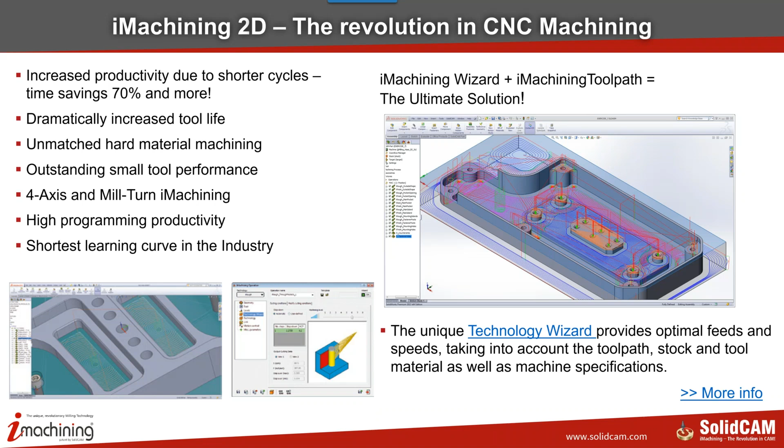Now, basically, iMachining has what we call the iMachining toolpath and the iMachining wizard. What exactly is the iMachining toolpath? It's an intelligent toolpath generator. It calculates the most efficient and tangential toolpath, which ensures constant mechanical tool load. In other words, we're always trying to do a constant tangential toolpath. All the toolpath is always tangent. There's no such thing as a sharp turn inside iMachining. So there's always a constant load on the tool.

And the other thing we're talking about inside iMachining is the technology wizard, which actually does the calculation of the toolpath itself based on certain facts that are given by the operation itself. And we'll talk about that as we go along.

Now, what are the problems that we normally face when working in the traditional manner, as I like to call it? Well, if we take this pocket over here, the pocket geometry itself may be tangent on the corners. But when doing the racetrack path inside a normal pocket operation, when you get to the corners, you'll always have sharp turns. That in itself causes vibration, which is no good. So you have what they call non-tangent toolpaths.

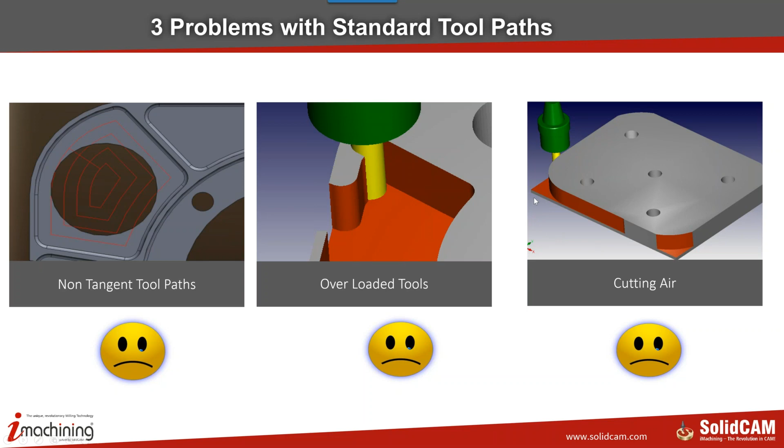Also, you're causing, in many cases, overload on the tool, where the tool engagement goes even up to 180 degrees of the diameter of the tool, and that causes negative effects on the tool. Also, when cleaning around the part, you always have excess material on the corners. So normally with the racetrack toolpath, in order to clean that area, you're going to have a toolpath that goes around in the air. So you're wasting all that time. Okay?

Also, with a traditional fixed toolpath, you have a fixed step over, which is not good, especially in tight corners. So what happens? The operator has to slow down. He has to work slower, and he also has to take shallow cuts to deal with these types of situations. Now, even though you may need a slower cut for a specific area only, since you have to do it in those areas, the entire toolpath is a lot slower.

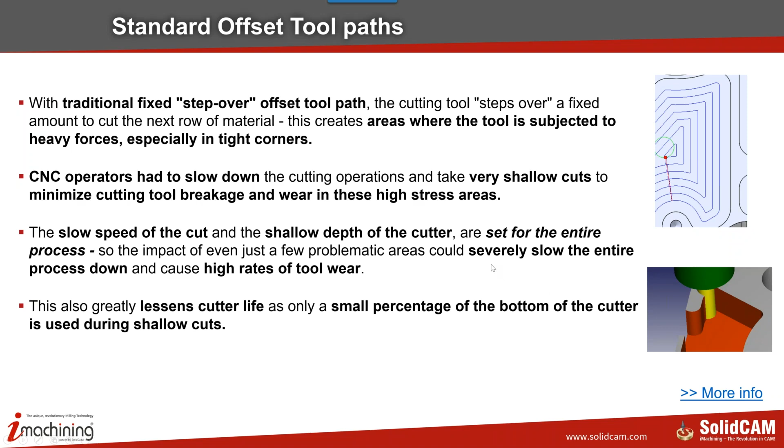And you're also cutting with a small amount of the tool because you're taking shallow cuts. So the cutter life is, since you're only cutting with a small part of it, you're not getting the full use of your tool. You're going to wear out the bottom of your tool a lot quicker also. And you're also working a lot slower than you really can work.

Now, what do we do in iMachining? First of all, we have the intelligent toolpath, where you'll see that we have a smooth tangent toolpath. The toolpaths are always tangent. As you see, we have here a spiral, and even when you get to the corners, we have trochoidal cuts where there is no such thing as a sharp turn. You can see that very clearly over here also in these particular cases where the step overs are completely controlled. And we'll talk about that further on.

Also, we're cutting the exact stock. There is no such thing as air cutting. It'll only cut where it needs to cut. These areas, it will not work in those areas, and just jump over to the next area. So as I said, we can take deeper cuts because of that. You're cutting with the entire tool. And we're also controlling our engagement angle over here. We'll never over-engage the tool itself inside iMachining.

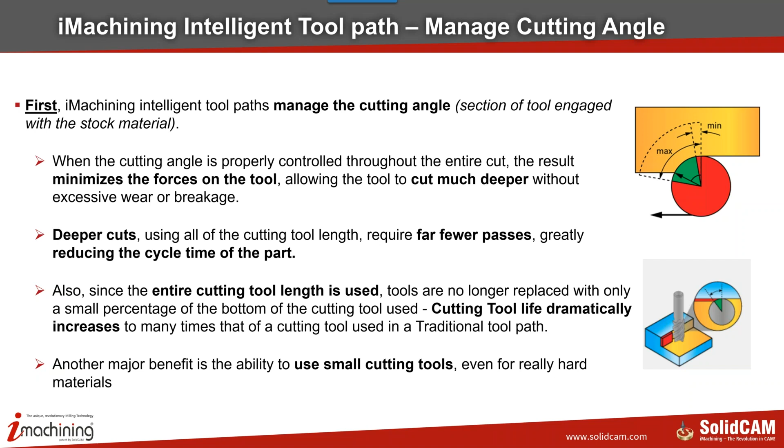Now, another important thing is the feed rate when creating the tool path. We have what we call here a morphed situation, where the tool path actually gets the controlled step over. Sometimes it's wider, sometimes it's shallower. So we actually control the feed rate at any single point. So what that means is that no matter where you're cutting, your load on the tool, your chip thickness on the tool is constant. When you have a constant tool load on the tool, that also greatly increases the tool life.

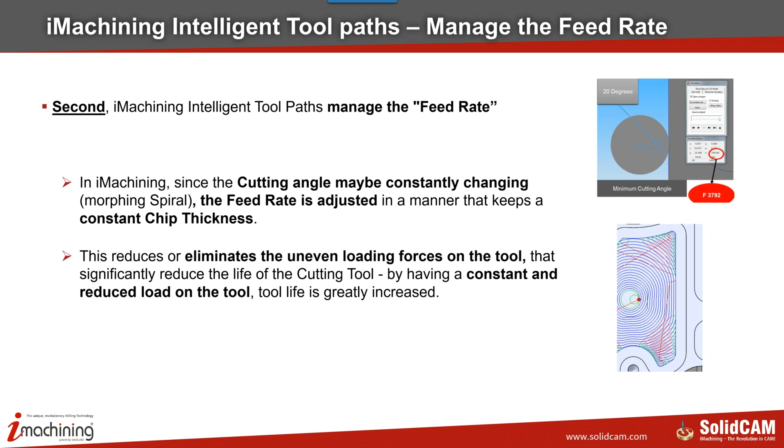Also, not only that, we have what they call repositioning. In the cases where it doesn't cut in a spiral cut or a morph spiral, where it does a trochoidal cut, the repositioning is done very smartly. It keeps itself down and it goes there very quickly, knowing exactly where it can move quickly in a rapid, and repositions itself in those areas. So when you do that kind of a repositioning in these areas over here, you don't need to go around the part. So that takes care of unnecessary moves and also eliminates the air cutting.

Now, as we're cutting, as I said, we also have complete control. We control exactly the minimum and maximum cutting angle of what our tool will be cutting at the time. Also, depending on the material, we can go from anywhere as little as 10 degrees up to 80 degrees of the tool cutting angle over here.

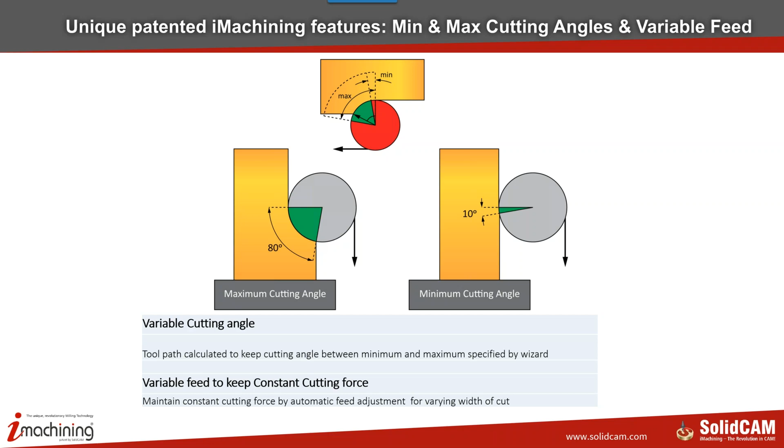And you can see that when we're working on, let's say, 20 degrees, you'll get a faster feed rate. Whereas working at a higher angle, even up to 80 degrees, you get a slower feed rate. You get a slower one here and a faster one over here. Here, there's less of a load, less of an amount of material, so we can go faster to keep the load constant.

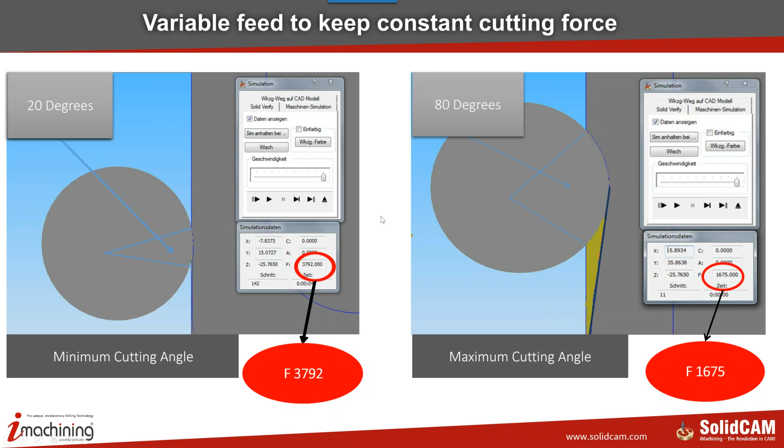And after that, we will spiral out those areas, because now we can machine around from this side and this side and this side, now that this material has been removed. We also have complete control of the efficiency of the spiral. We actually leave that to the user. We have a specific setting inside the program, which we tell people you don't really have to touch. But if you want, you can also decide on how much of a spiral you want.

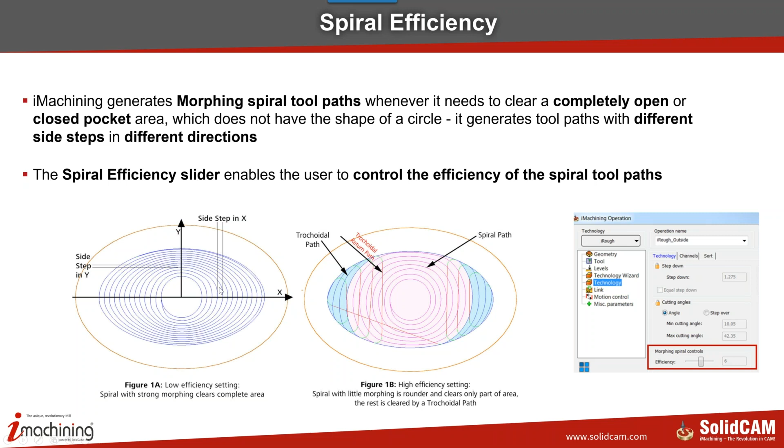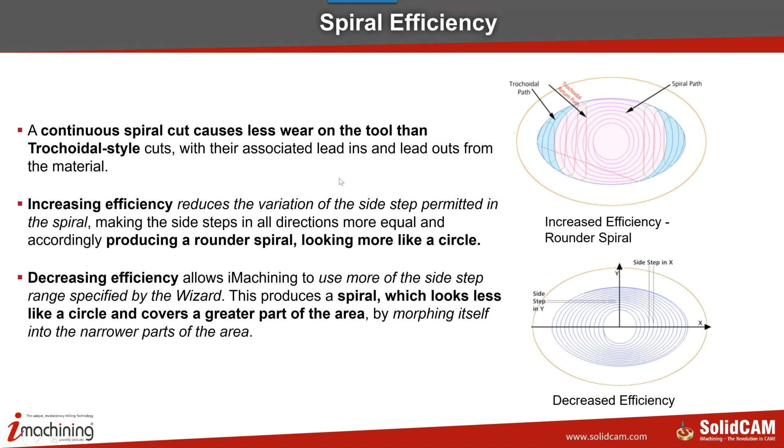Sometimes you can say, you know what, I want to have a very tight spiral. You see, so the side steps here are pretty much equal. But then to clean out those areas together, you need trochoidal cuts. Whereas if you have more of a morph spiral, you can cut more of an area with the spiral cut. As I said, a continuous spiral causes less wear on the tool. Now, let me go a little further.

Now, why do we need the moats? I think I just explained it. It allows the tool path to go around and create the spiral cuts that I mentioned before. We can see that very clearly in this picture over here. If I do a complete spiral cut, a morph spiral on this entire part, which I can if I want to, you'll see that these side steps over here are very, very small as compared to this. I can do that without any problem.

Of course, it may have a little less wear on the tool, but the amount of time it takes to cut this is a little longer. You can see when we cut something like this, it's 5 minutes and 4 seconds. However, if I put in the separating channels, as you see over here, it'll separate those areas and then continue with a spiral cut in each area itself. So that also cuts down on the machining time.

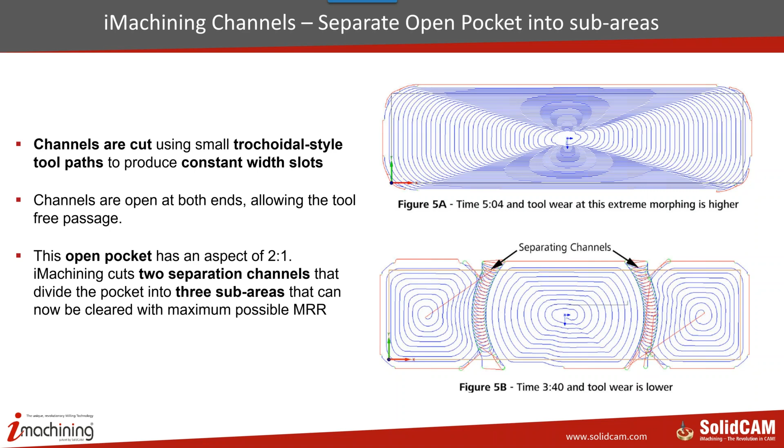Now, in iMachining, the algorithm actually measures everything and decides on its own which is the better way to cut. But again, we also give you control if you want to do it differently. This can also be seen in cases like this. You can see over here, we have a wall and a large area. If I didn't put a separating channel, this is how it would cut. It would do constant trochoidal cuts around the part.

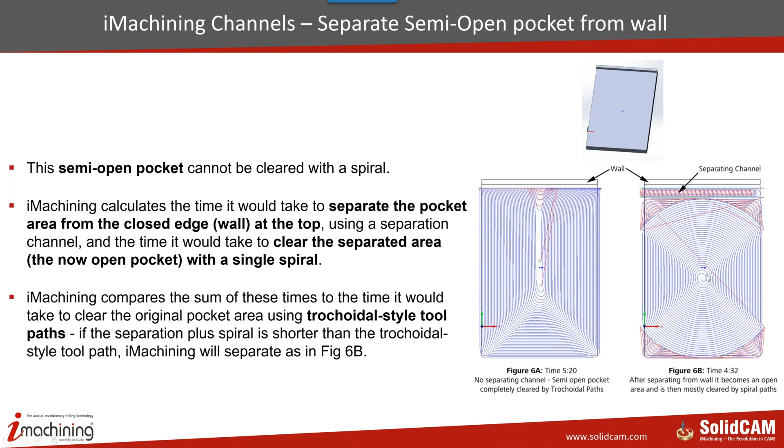Sometimes you have no choice, and we'll explain a little later on why I wouldn't have a choice. And there are other times where it's better to do a separating channel and then do your trochoidal cuts and your morph spiral over here.

Now, let's say I have an island in the part, and I was working from the outside. How do I keep it doing a spiral cut as often as I can? When we get to a certain point, we do a spiral as much as we can, and then we do a moat around the island, or a separating channel. We form a separating channel around the island, allowing us to then do more of a morph spiral inside the part itself.

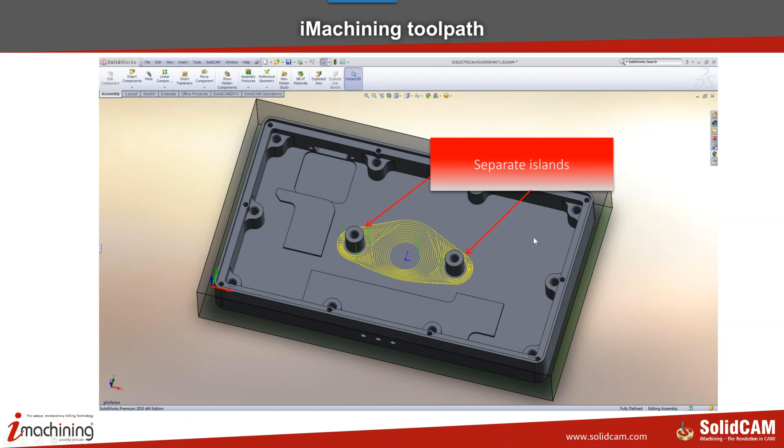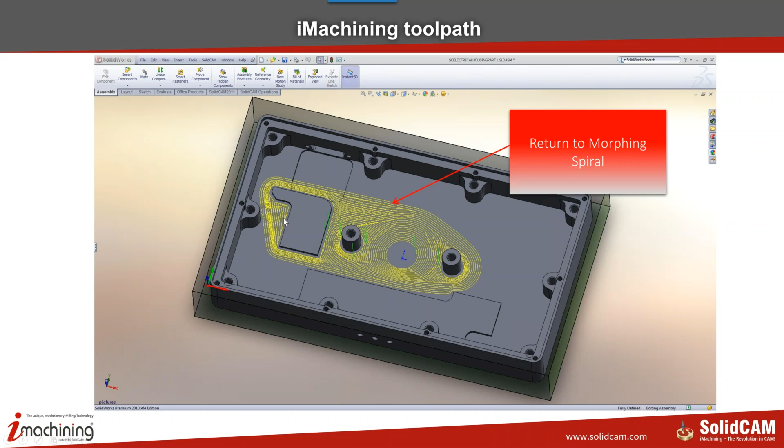Now let's take a look at this particular part. We have to machine out this pocket. In the beginning, it's starting with a morph spiral, but now it's hitting these islands. So it does the separation with those little moats I talked about around the island itself. Once it does that, it can continue with more of a morph spiral until it hits these walls. Then it continues with a separating channel around here. Now it did a little more of a spiral and also trochoidal inside here as well. And that's how it works.

Now we also have a function called rest material. For example, obviously I'm not going to machine a large part with a small tool if I have small radiuses. So for the rest material, we'll only machine the areas that have to be cut, such as these corners, using a trochoidal cut in this particular case. And even in the areas it couldn't get into over here, it'll also complete finishing those areas.

And when I do a finish cut, if I had those, it'll first do a semi-finish in the corners, doing trochoidal cuts, and its final cut will go around the entire wall, giving it a nice smooth finish. Now you can also see that when we cut out parts with a closed pocket, we also do a helical ramping into the pocket to get down to the bottom, and then finish off with whichever tool path we need to use. We can see that very clearly over here.

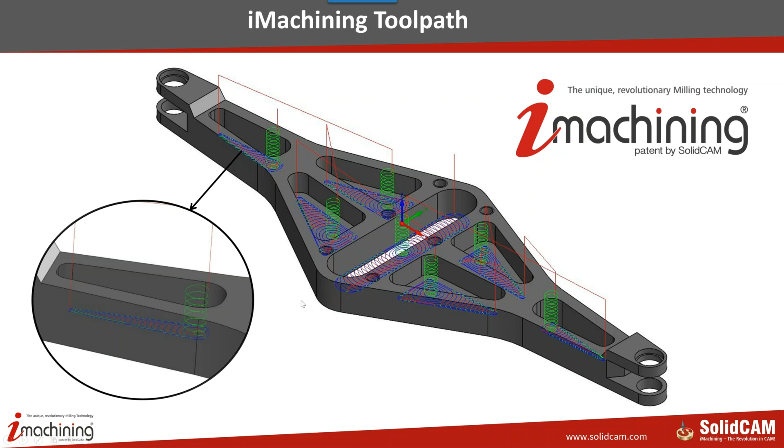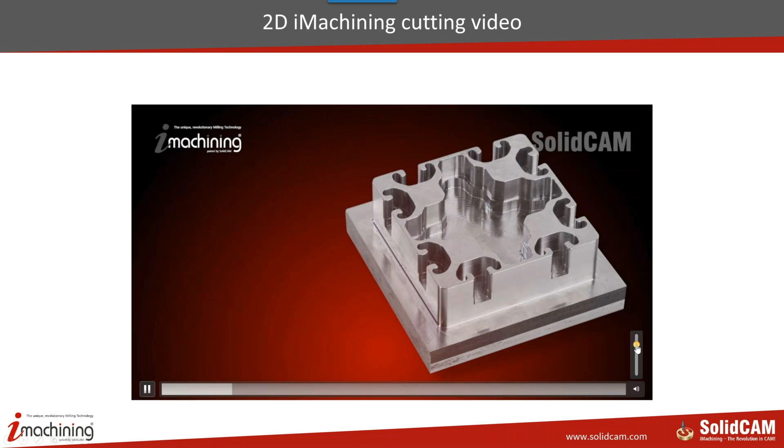Now let's take a quick look at this film. I hope you can see it as well. I want to get to a specific point, this point over here. We've machined the outside. Now we have to start machining inside over here. What you see happening is the tool going inside using helical ramping, the 10 millimeter end mill, and it's going down to a depth of 19 millimeters.

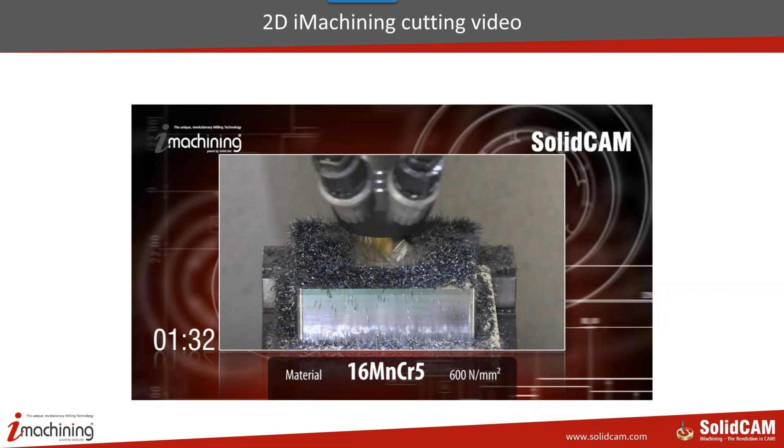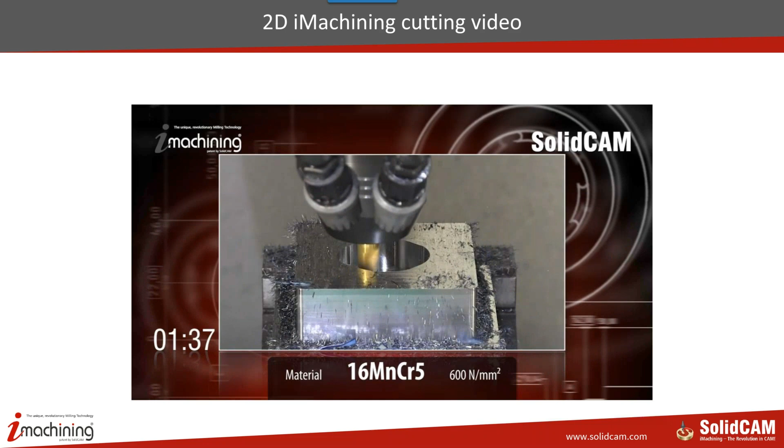Now look what happens when it hits the bottom. What happens with the feed? You can see all of a sudden the feed picking up. We're just doing it in slow motion, so you can see exactly what's happening. You can see it doing a morph spiral cut around the part, which is constant load on the tool, giving you the most efficient way and the best way to cut with the tool itself.

Now, when a typical programmer has to cut out material in the part, what are the dilemmas he always has when programming in the traditional way? Even the most experienced machinist has to take into consideration, one, the type of material that he's using, what kind of cutting speed he needs for that material, the hardness of the material, what's his maximum step, what's his minimum step into the part. This is something that the user always had to do on his own.

As far as the tool goes, he had to know the length of the tool, the number of flutes, the helix angle of the tool, the chip thickness that he's allowed with the tool itself. All of these he had to know just by experience. With the geometry, he always had to take into consideration how deep he has to go with each cut. And with the machine itself, he had to know the maximum spin rate or feed rate, the power of that machine, even the memory size of that machine. He had to take that into account.

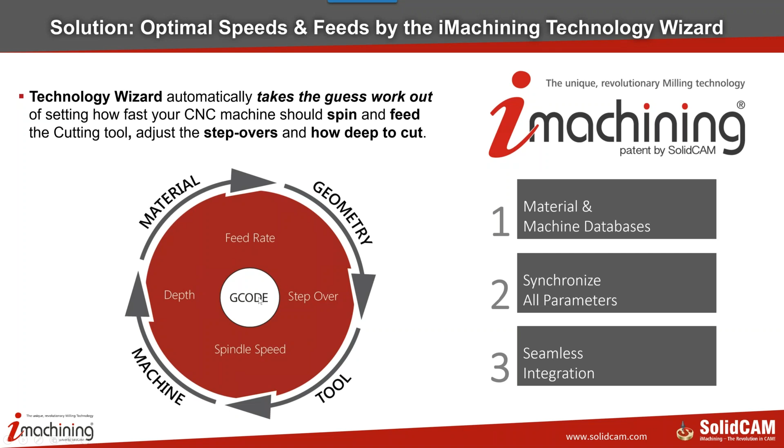Now, iMachining deals with all that. Together with the technology wizard, it takes into consideration your material, your geometry, the tool that you're using, even the machine, puts it all together, and gives you the right G code for exactly the way it should be done on the machine. It should be noted also that iMachining is patented by SolidCAM itself.

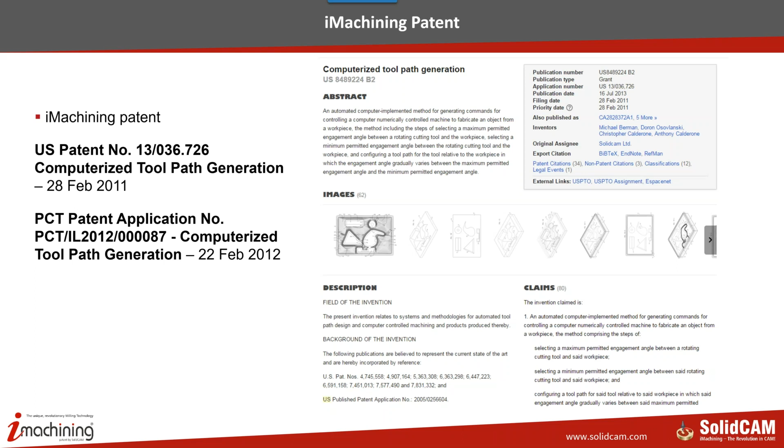Now, there's one other thing that we have inside iMachining, something called the iMachining level slider. We'll talk about it, and I'll show it to you later on as I show you the actual program itself. What's the role of the iMachining slider? The iMachining slider allows you to be more aggressive on the part, or work in a less aggressive, a little more safe mode, I might simply call it. It actually controls the removal rate.

Sidney? Yes, go ahead. I have a question. When you say more aggressive or less aggressive, with this slider that you're using over there, it controls the speed, I mean the RPM, and the feed equally. Yeah. So if I want to separate it and control the speed or the feed separately, can I do it here? You can do that in the modify cutting conditions.

Okay, but take into consideration. You said that over here we control this, the levels control the speeds and feed rates. That's not all it controls. It also controls your minimum and maximum step over.

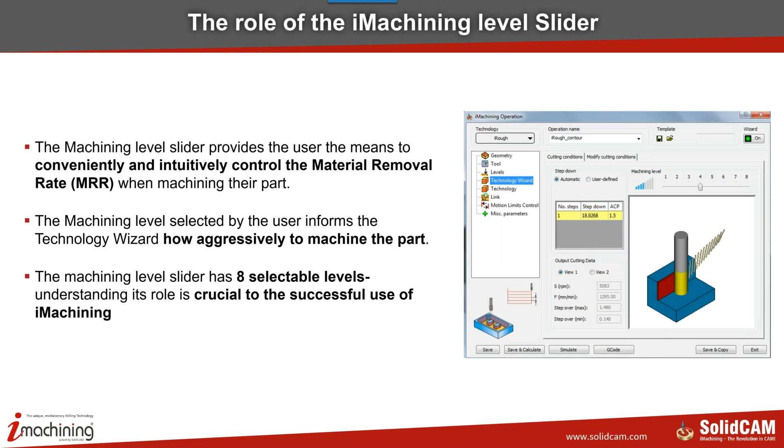Because remember, we're not doing any sharp turns inside there. Even when you get to the corner, it will not go to a point and all of a sudden sharply turn. It does a trochoidal turn inside the corner. In other words, your tool will never have a radius of the exact tool radius. Okay? Yeah.

Now, the technology works, it makes its decision knowing the following. It knows the part geometry, the material properties, the tool properties, and the machine limitations. Okay? Now, the algorithm works hand in hand to give you the exact tool path generator with the proper feed and spin rate and the proper step over, making it very safe to work on the CNC the very first time.

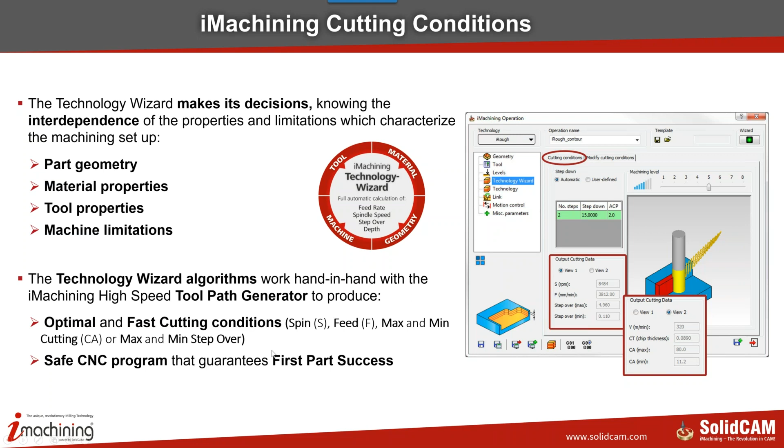So you may ask, why do I need a level slider? I mean, why not work all the time with the highest level if we're controlling everything? The answer is very simple: potential vibrations. And what do I mean by potential vibrations? Okay, there are certain things we know. We know the tool, we know the material, we know the geometry, and we know the capabilities of the feed rate and the spin rate and the horsepower of the machine. All that we know. There are things we don't know.

Let me go to the next thing. There are certain things we don't know. Okay, let me go into that. Sorry, I went back a little too quickly. Okay,

we don't know the rigidity of the state of the machine. In other words, if it's an old machine that has more backlash, how you maintain your machines, those are things the program doesn't know. Only the user knows. Also, when you're clamping the workpiece onto the table, we don't know how well you're holding the part, if it's a really rigid fixture or some lightly used clamps, okay?

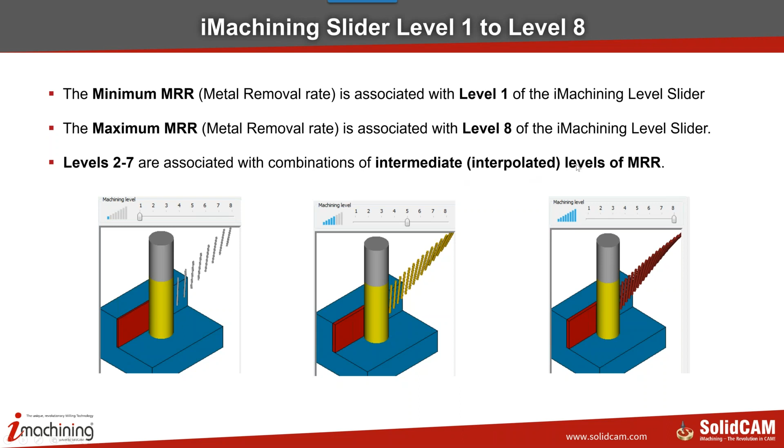Okay, now there are times, even with certain materials, where even going up as high as 8 is not enough. So in our modified cutting conditions, we have something called turbo mode, which actually takes the levels and ups it by 25%. For instance, in aluminum, we found that you can even go higher. And many times I've demonstrated aluminum working.

I remember the first time I demonstrated this for a person, I went to his tool shop, and he had a 90 millimeter deep pocket, and he was using a 16 millimeter end mill. And he had like a 30 millimeter depth of cut, I believe, on the end mill itself. I put it on the machine. He had already pre-drilled a hole, even though he didn't have to. And I put it on turbo level 7.

And he said, "Are you sure?" And I said, "Don't worry about it. Tool breaks, I'll replace it." Okay? He started working, and all of a sudden, you hear the noise coming around. He jumped away, and all of a sudden he starts looking. The owner of the shop came down to the machine. He said, what's going on here? And he saw how much material was coming out, and he couldn't believe what he was seeing. At the end of the cut, we looked at the tool.

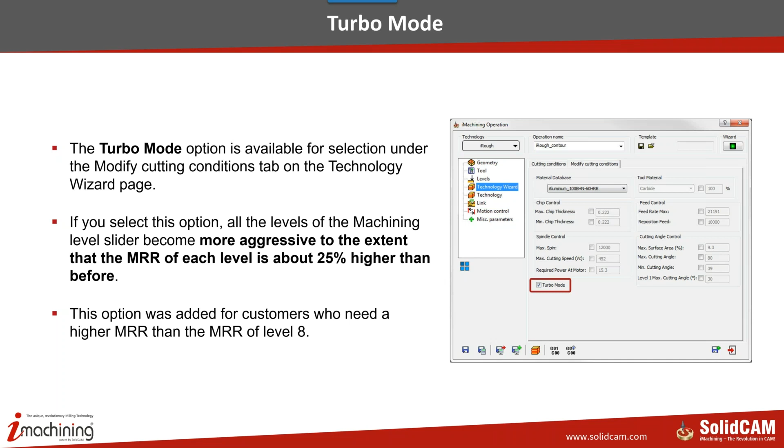But let's go further now into the program. Okay. Now, when defining a machine in iMachining, we can define also what's the default machining level. In other words, you have a specific machine, you know already how this machine works, you can set yourself what you want as a default level. It doesn't mean you can't change it inside the program itself.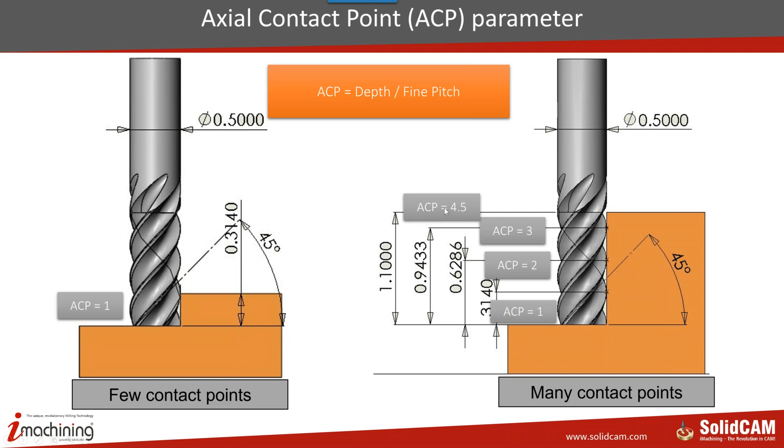Okay. Now, as I mentioned before, it reflects the actual number of contact points with the vertical wall it's cutting along a vertical line. Okay. Example. Now, what I mentioned before: 1, 1.1, 1.2, 1.8, 1.9. You notice these are close to full numbers, to whole numbers. The vibration over there is less likely.

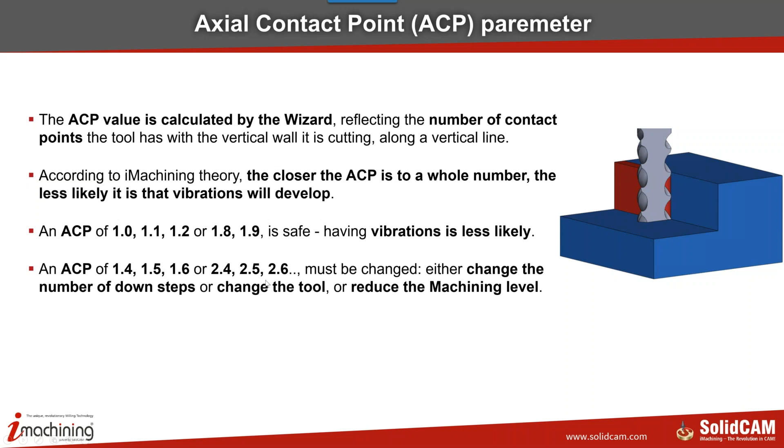Okay. Whereas you have something like 1.4, 1.5, 1.6, or 2.4, 2.5, 2.6, you have more of a chance of vibrations. So we can control also the down steps if we want. And some people are willing to work even in those conditions. But just know that we take that into account when working with iMachining.

So for example, we also mark it, by the way, inside the technology wizard. You'll see sometimes the amount of steps. You'll also see the step down, and you'll also see the total step down, how many steps down it has to do each time, and you'll also see that it's in red. Okay.

Sometimes if I mess up with the colors, excuse me, I'm colorblind, but it happens every now and then. But okay, yellow, it's not so good, but it's pretty good. Here, this one over here, see, you have 1.9. It's very close to a whole number. That's an excellent cutting condition. Okay.

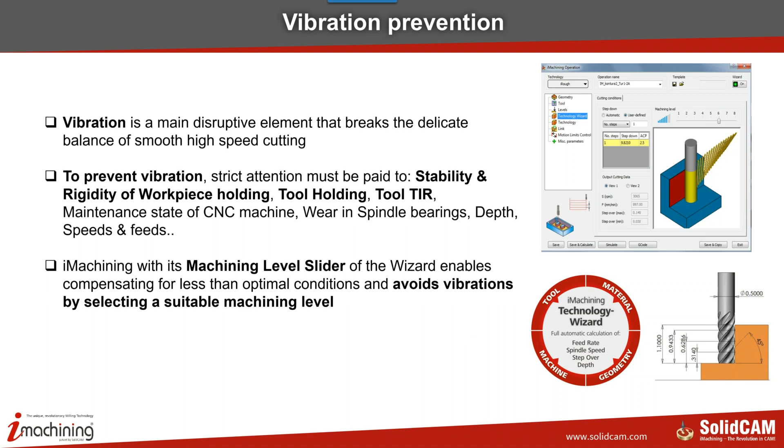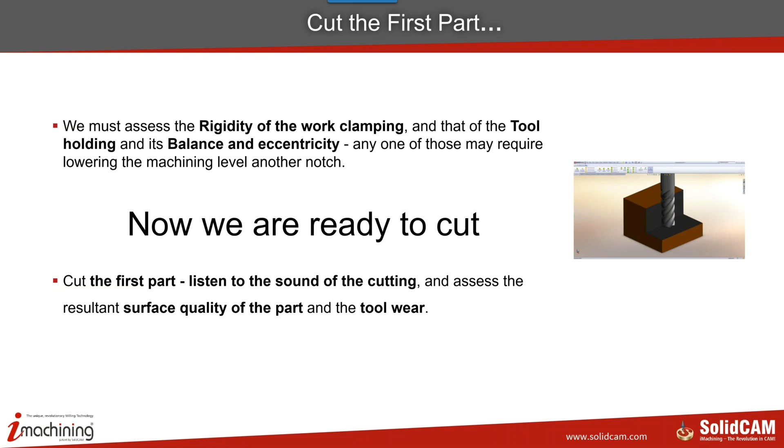So the level slider also helps control the vibrations, because you're putting in the exact right amount of pressure that you need for each particular case. Now, once you have everything set, you're ready to cut.

Now, I always recommend when working on iMachining, when you first start out and you're not sure, always start out with a lower number. Okay? You listen, you hear there's no vibrations, you can start working your way up until you get used to it. Once you start working with iMachining on a constant basis, you'll know already by yourself. But in the beginning, start always with a lower level.

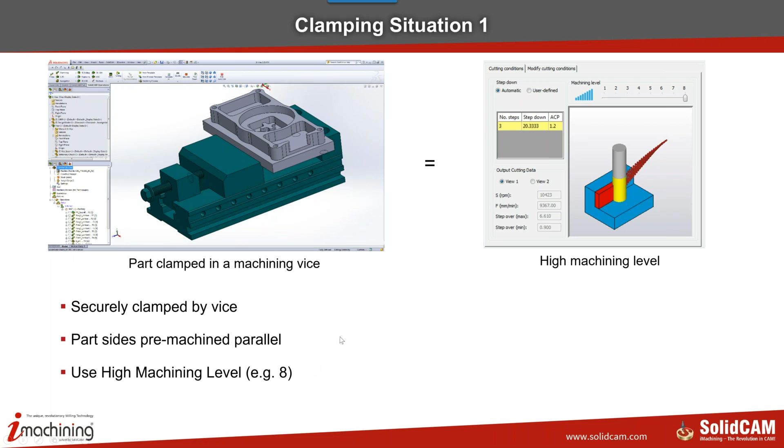Now, I mentioned before what kind of situations you would use different machining levels. So for example, if I'm holding a part clamped in a machining vise, a pretty rigid way of holding, I'm not talking about the machine condition, I'm talking about the clamping situation. This particular clamping situation, we could go even as high as 8. Okay? A 5-axis clamping position held very well can also go many times up to 8.

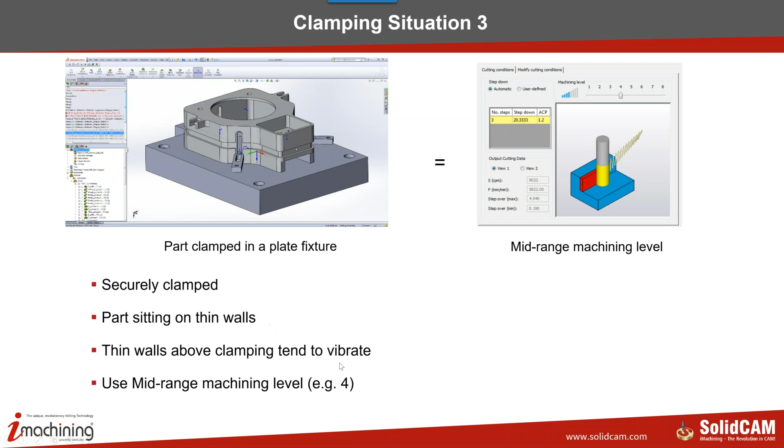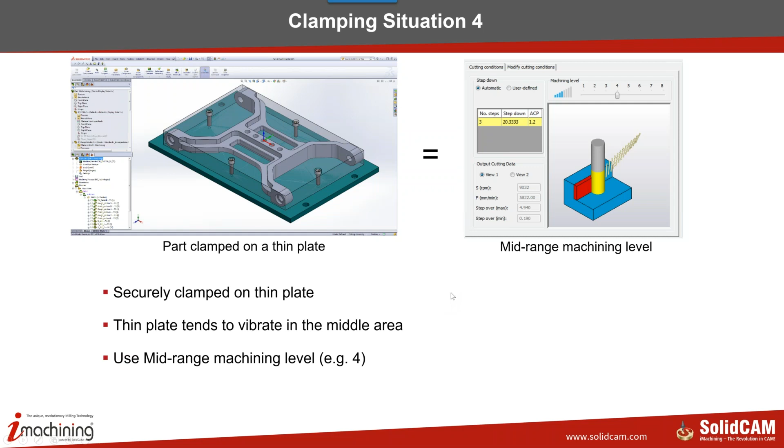Holding it clamped on a fixture plate is not always as good, but sometimes you have no choice. Okay, so in those particular cases, you may start off with 4. Okay, even with a clamping plate like this, held on 4 screws. On a thin plate, you may also want to start off at a lower level. Again, if you see it's fine, you can always pump up the action.

And I've seen this, by the way, in a machine. One of my first trial cuts with somebody, he was actually holding it on a fourth axis turn head inside the milling machine. So even though the plate was fine, the basic support is between two centers. So the further out you got from the center, the more vibration you had. So you could not work at a high level. In that particular case, I even went down to 2. Okay.

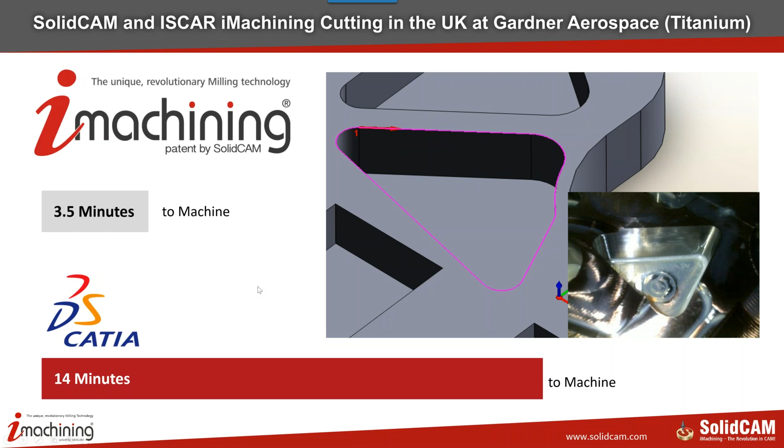doing it the traditional way, I know you guys are not ISCAR, but we did it on ISCAR. I'm sorry about that. But when they tried it with the most efficient way they knew how to cut without iMachining, it took them 14 minutes to cut out this pocket. We used iMachining, changed everything over to iMachining technology. It took them 3.5 minutes instead. Okay.

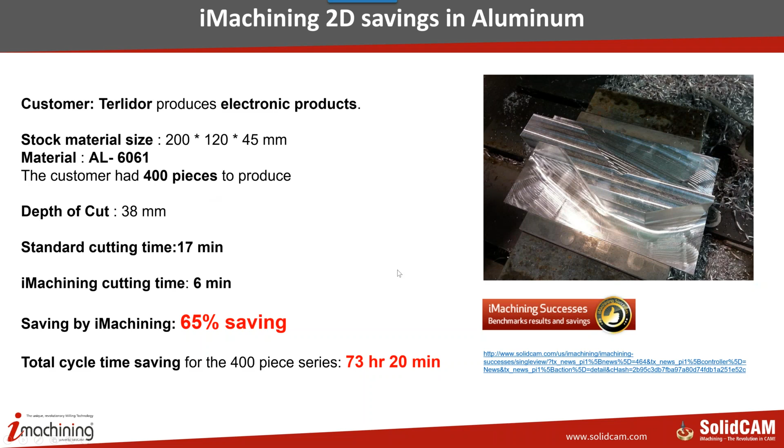We have also different trials that we've done where we cut down from 17 minutes to 6 minutes on aluminum. People say, how come? Well, aluminum, I can really work hard. So even on aluminum, we're a lot more efficient. Titanium is an excellent case of where to use iMachining.

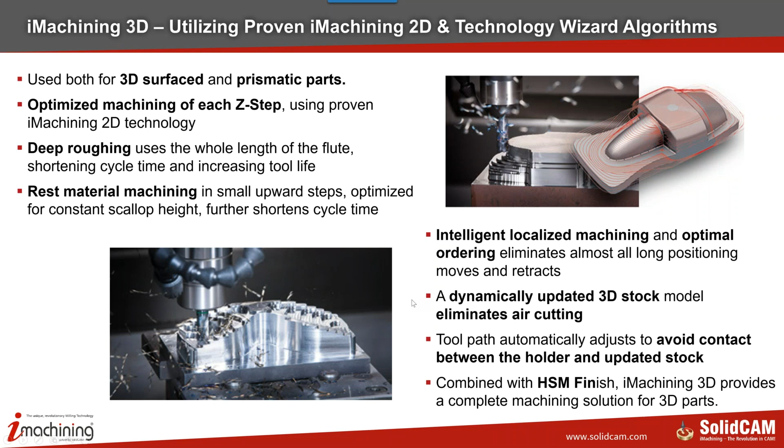And we also have what we call iMachining 3D, where it uses the technology that we know in iMachining 2D, but it optimizes the machine. It does the deepest cut it can, but then, since it's shaped over here, it does what they call a step up on each area, and then makes steps on the part itself. You can actually see the machining over here, and I'll show you a little film about this in the morning. It optimizes the Z step cutting. It slices into Z's.

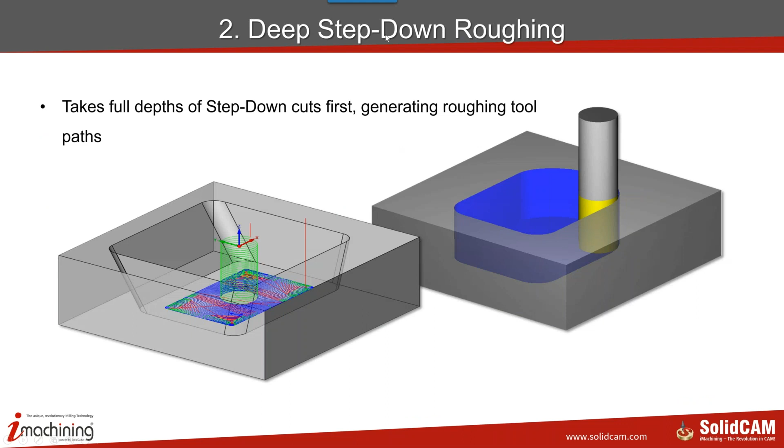Going deep into the pocket, doing as deep as it can. As you see over here, it's going to do first the very bottom. You can see the trochoidal cuts in the corner. Then after that, it does a scallop going up. A controlled scallop, and that's how it works.

So you tell it how big you want the scallop, and certain areas will have larger steps, and the steeper areas will have smaller steps. You can see that immediately on this as well. And we can set the size of the scallop that we want. Now, during the step up procedure, the axial depth of cut gets smaller.

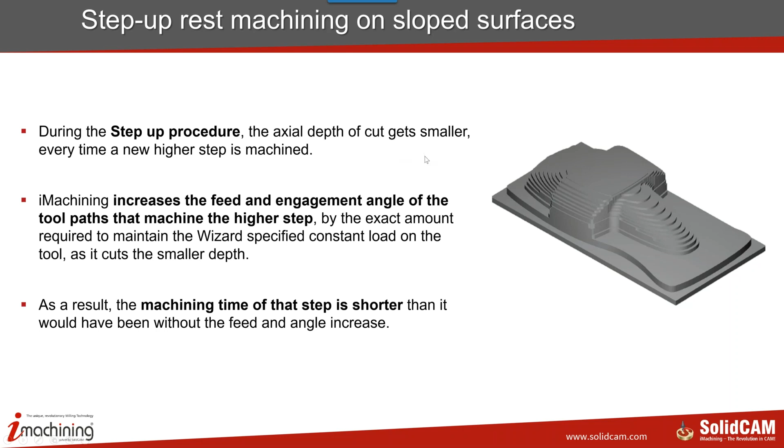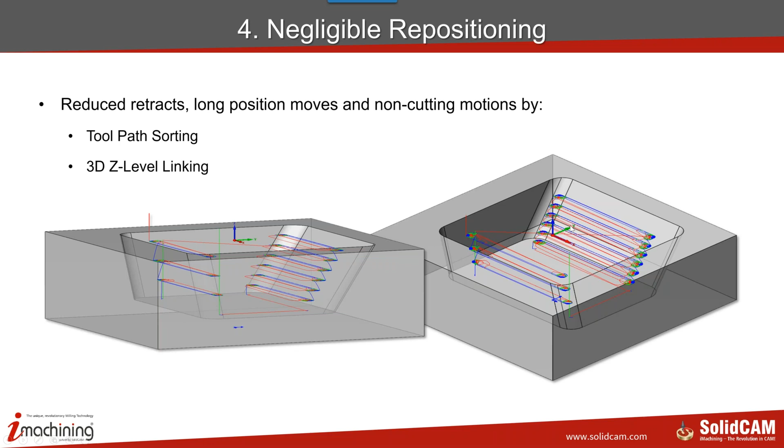Now, let's take a look also at this particular part that I showed you before. It'll also only work where it needs to. Now, look at this. You see it's working only on that side now, doing its step up. These walls were flat walls on the side over here. It doesn't have to do any kind of machining over there. So it's just working in the areas where it needs to work.

Now, when it comes to using a smaller tool afterwards to clean out the corners, it'll only work in those particular areas. And you can see that also very well over here. And I believe, Zoro, you asked me before about the corners. As you can see, even in the corners it did trochoidal cuts. Okay.

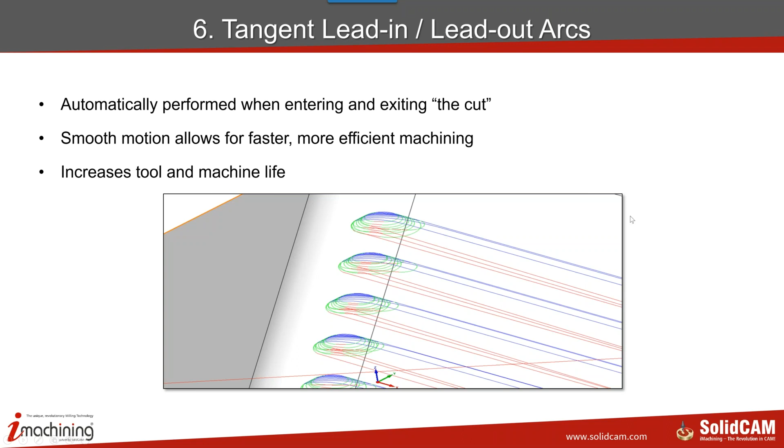And whenever you have a lead into the part and lead out, it's always tangent: lead in with a tangent, lead out always with an arc. So there's never any sharp turn. Okay? Now as you're going up, the cutting conditions are adjusted automatically. Because when you're down at the bottom, you're cutting with the full step of the tool. But as you go up, there's less of the tool that's actually cutting.

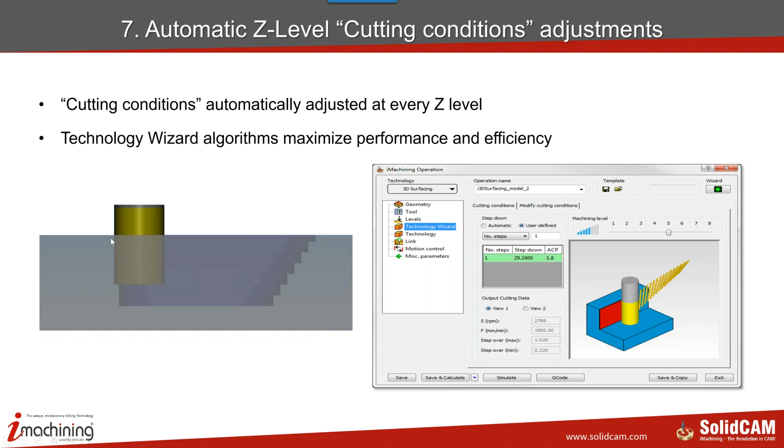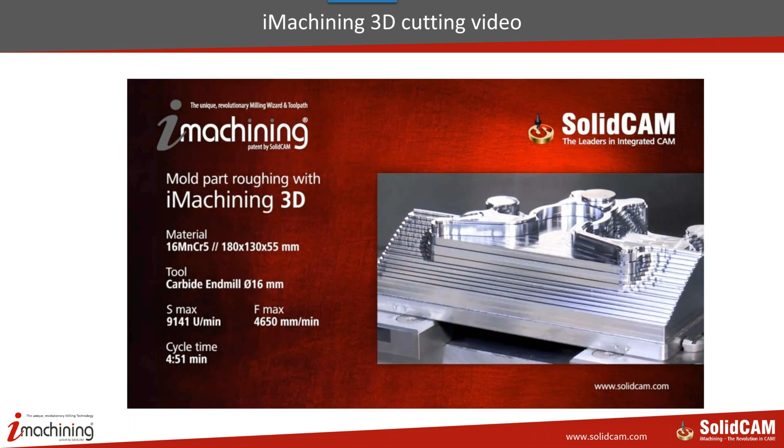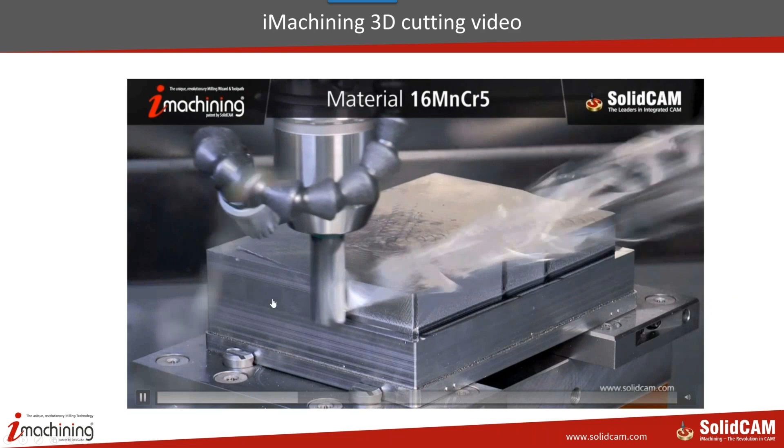And as I said, iMachining automatically determines the cutting conditions. Now let's take a quick look at this film of how it cuts a 3D mold. Now you can see this has to be done with a specific step down, because it probably has to go further down over here. So note that it's cutting first, and now it's also starting to step up. Starting to step in. The trochoidal cuts in, and now it's stepping up.

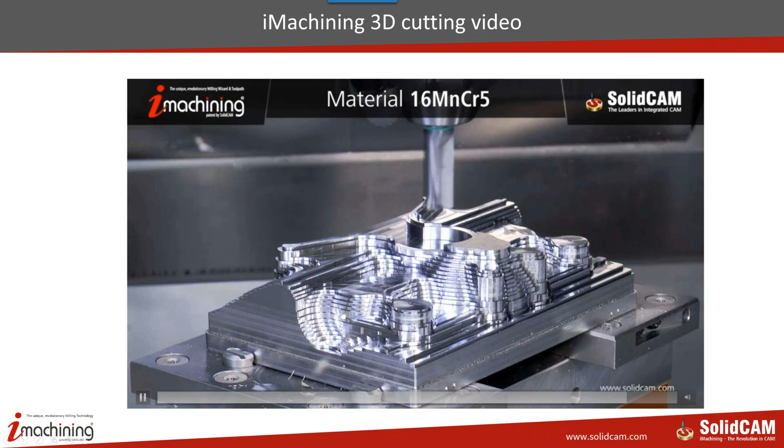And you can also notice how it localizes itself to work only in a specific area and then moves on to a different area. So you don't have this repositioning around the entire part. It always cuts in those particular areas.

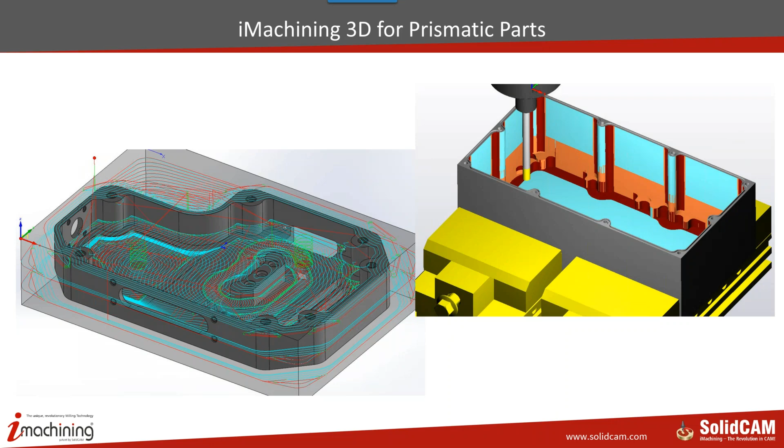Okay. Now, iMachining 3D is not only for 3D; it can also be used for prismatic parts. For instance, I can do this part in iMachining 2D, no problem doing it. But with iMachining 2D, I have to program each one of these areas; each one of these depths has to be done in a different pocket. I have to do one operation after another operation after another operation. If I use iMachining 3D, it automatically recognizes the depth of each area and knows to work on each pocket exactly the way it should.

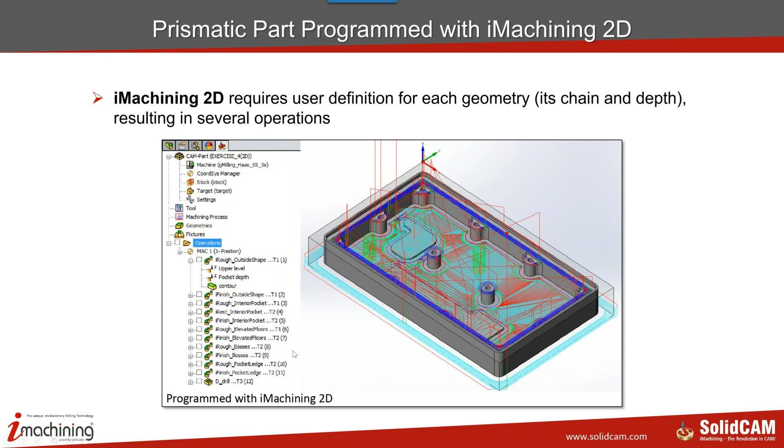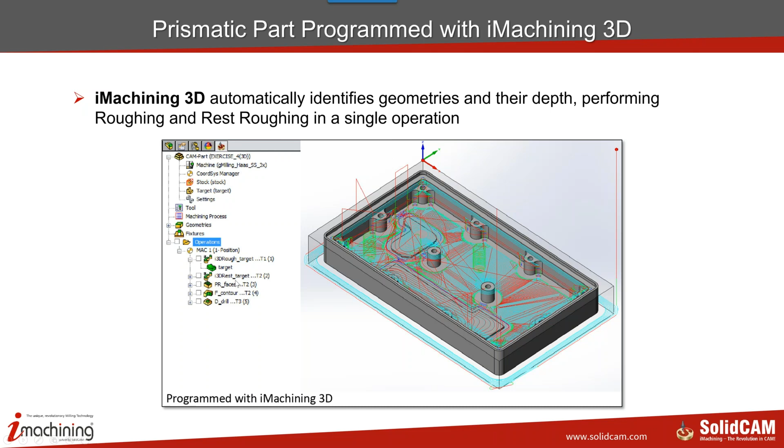Now, I should mention, iMachining 3D is a roughing tool. Okay, it's meant for roughing. Now, for prismatic part programming with iMachining 2D, as I mentioned before, you can see all of the operations needed just for this. If I use iMachining 3D, you can see that we basically have two iMachining operations, one for the roughing and one for the rest material, and then we just use different technologies for finishing. Okay.

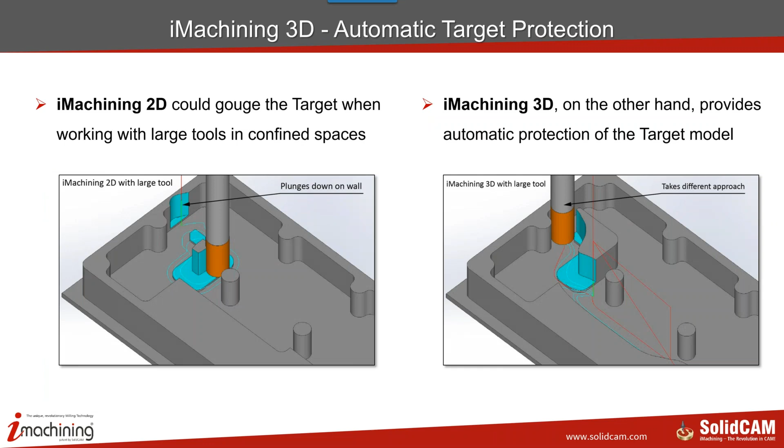Okay, and I mentioned in the very beginning that it's also used for indexial, or let me go further down in the presentation. I mentioned also that it's used for mill turn. Inside mill turn, we also have it. It's very useful. So we'll take a look at this little film over here. Type of machine. All right, we start with the regular mill turn. That's fine.

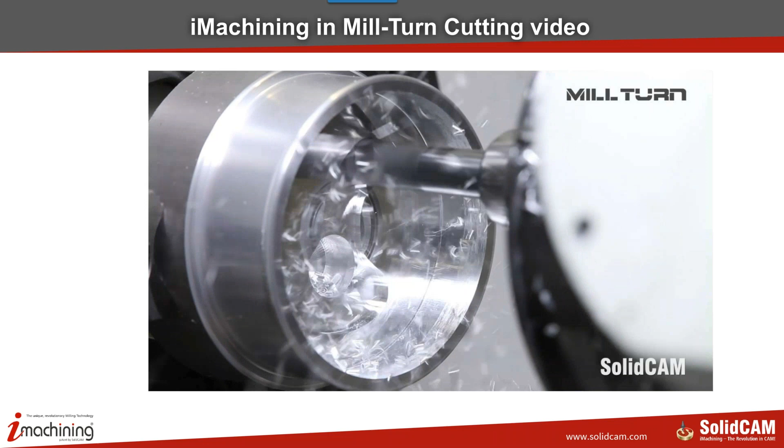Now you can see this is a regular pocket over here, but I want to go a little further on in this presentation. Here we go. We get to the other side. You can see how iMachining is used inside a mill turn machine. In this particular case, the cutter can't go past half the way, so we use the C-axis of the machine itself. You can see very clearly the trochoidal cuts it is doing on the side over there. Okay.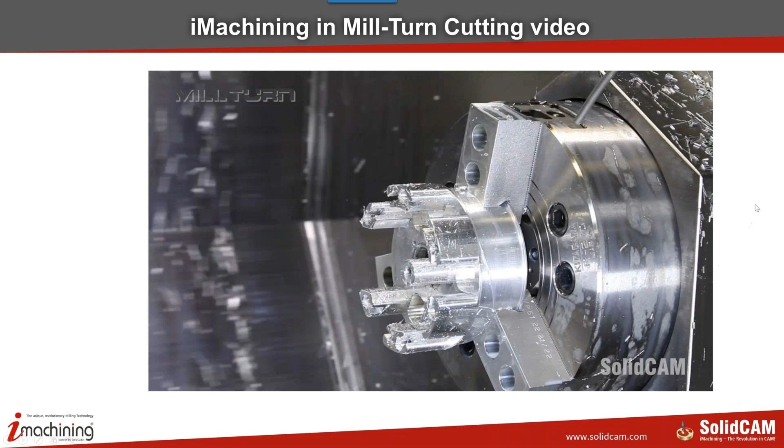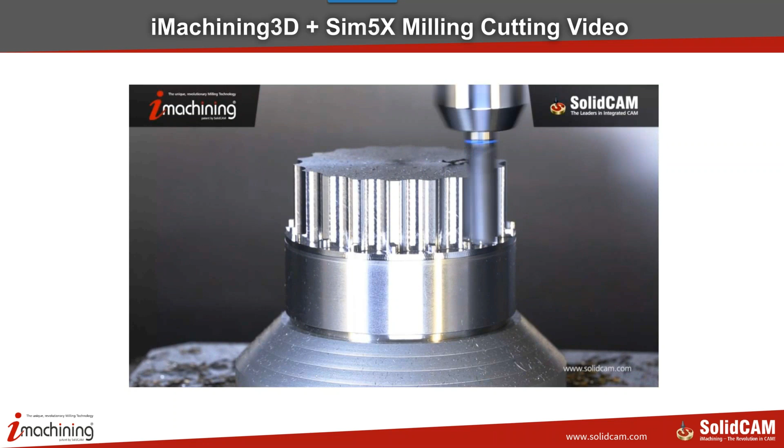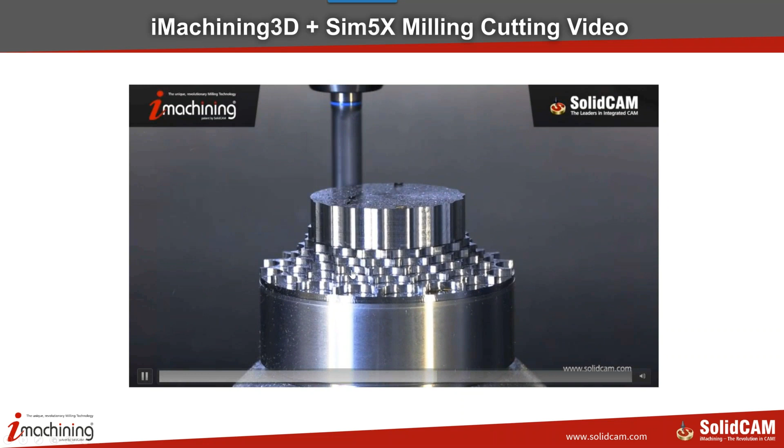And we're even using iMachining 3D together with simultaneous 5-axis machining. Move it ahead a little over here. You see, we're using the maximum amount of the tool that we can. It basically does that around the part itself. Then when it finishes that, let's see what happens now. See, now it's actually working in a morph spiral around the part. And now over here, you can see the actual step up that it does on the material.

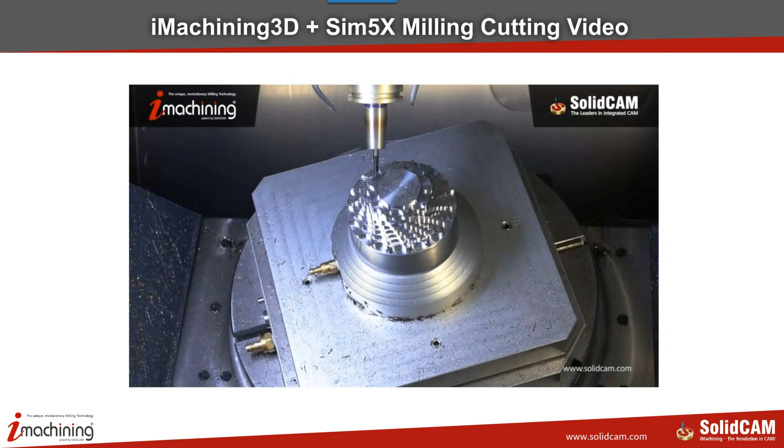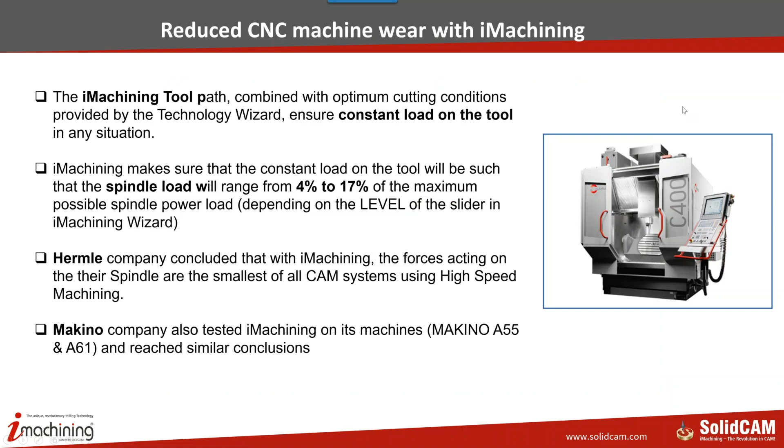So once we finish the roughing on this, there's a lot less material left over now, a lot easier to do your 5-axis simultaneous machining. Okay. That's all I'm going to show you right now in this presentation.

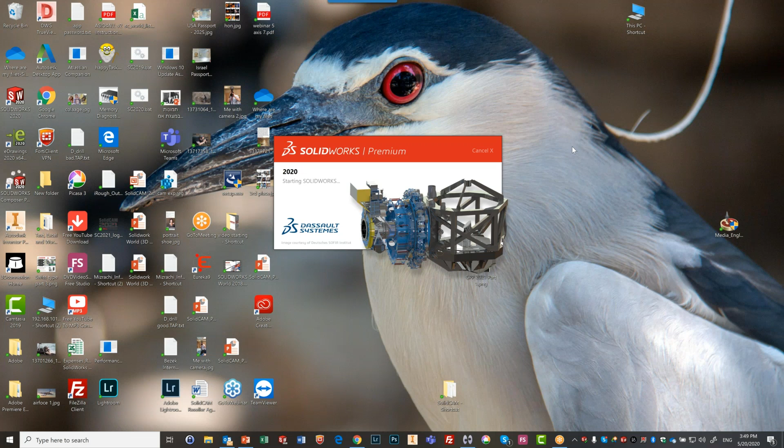Are there any questions? I know we didn't touch on the program itself. I still have a few minutes left, and I can start showing you certain aspects as far as setting up the part. Okay. So let me open the program. The bird does not come with the program. That's my personal photography. Okay, I'm going to load a part in SolidWorks itself. We're going to do the setup.

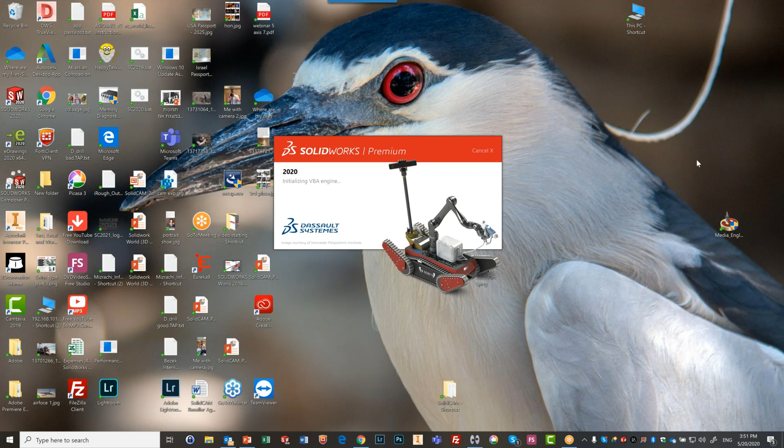Now, before I start the actual setup, oops, sorry, my mistake. Just before this, someone asked me to check something, so I forgot to put it back exactly where it was. So just give me a moment. Let me just go over here. And there we go. Okay, that's why my SolidCAM didn't load. Usually I'm very well organized with this. We'll just wait one more moment. Something is not working correctly here. Very strange. Okay, I think I know why. Again, if anyone has any questions, you can always ask. Okay, I think I know why.

Let me go into my add-ins. There we go. That's why. Okay, now SolidCAM is loading also. Usually I keep that on. Just another moment. There we go. Okay, now I'm going to reload the part that I want to work on.

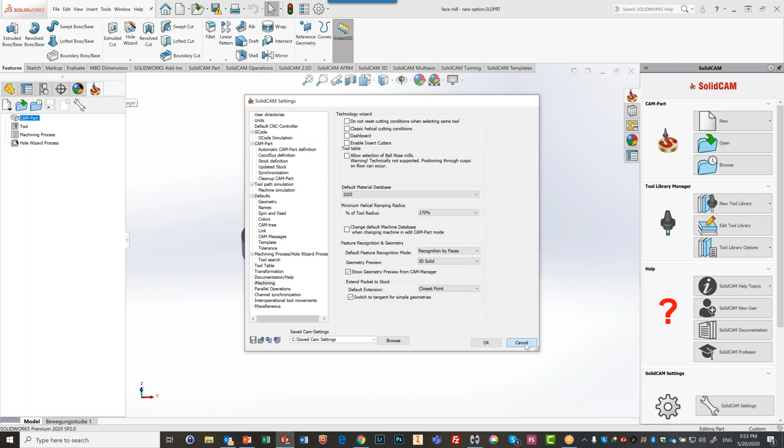I decided that most of the time, for some reason, I'm working on 1020 material. So I have that material in my default database. That doesn't mean I can't change it, and I'll show you this a little later on. But if you see this material coming up automatically, you'll know why it's coming up over here. Okay. So I'm going to start my program. I'll go to New, Milling.

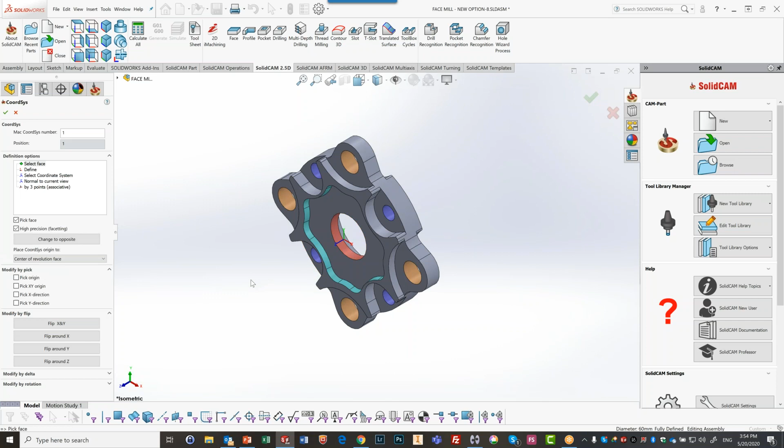Okay, I'll create my coordinate system. I'm going to have it at the center of the revolution face. I'll click on this face over here, so it's on the center of that revolution face.

And I've already automatically created my stock. You can see my stock at this point is 2 millimeters around the part itself. I'm not going to do a face mill operation, so I'm just going to leave this here as 0, as if I did one already. Okay? That's my stock itself. We have our target, which I talked about before.

Now let's go down here to the iMachining data. You'll note that my material that I'm going to be working on is a 1020, as I showed you before. However, if I click on this, you can see we can choose from all different types of material. And if somebody's asking, okay, what if the material doesn't exist over here? I can always go to edit my iMachining database.

And let's see, right click and add a new material. And then when I add new material, what's important over here, where's my material? It's actually down here. Sorry. New material. There we go. You give the name of the material, whatever it is.

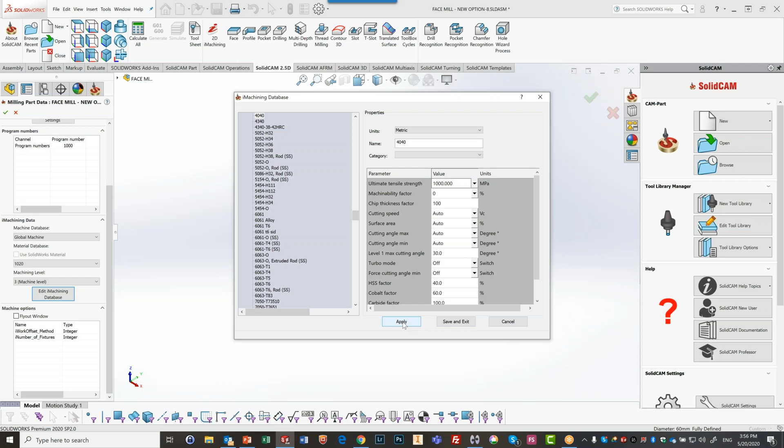There's something here that's very important, and what you do is you just go into the internet, look up that particular material that you're using, and put in here the ultimate tensile strength. Okay, when you put in here the ultimate tensile strength, let's say it's 1,000. I'm throwing out an example. I'll say apply, and I can do save and exit, and I'll have that material inside over here.

So if I go now to choose it, I can go here, and I'll have that material over there. Okay? Again, you can give it any name you want. Obviously, you're going to give it a name that makes sense to you, or the actual name of the steel, and just look it up online, put the tensile strength, and that's all you really have to do. Now, as we get into it, there's more you can play around with, but for the basic use, that's all you really need to do.

Okay. Also, the machine database. I have here something called Global Machine, which actually looks at the information about the machine from the VMID that I put in over here. Sorry. I clicked on that, except for that. Okay. My mistake over here.

It takes the information from whatever's in my VMID, or I can create my own as well. I don't have to use global. I prefer using global in most cases. This way, it automatically adjusts itself to the VMID of that particular machine. Okay, I'll click on exit. That's basically the whole setup. The setup is really very, very easy.